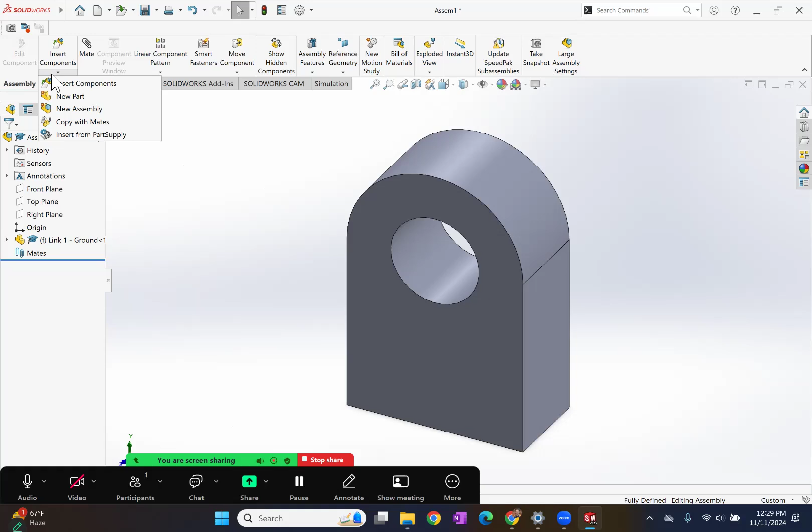Now you could either add them in one at a time and constrain them as you go, or you can add them in all together, just place them more or less where they should be, and then constrain them, which is what I'll be doing. So we have link two, also add link three, and then finally link four.

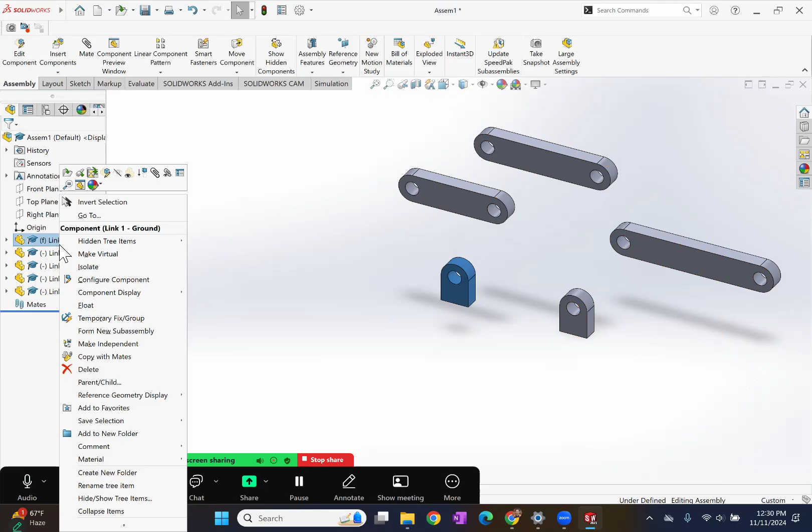So for my first constraint, or my mates, these two shouldn't be moving. These two will be our fixed parts. Before we are able to constrain them where we want them, we should make sure they're floating, so we're able to move them around. And these two, like I said, are going to be our foundation.

So the constraint that I want for this first part, I can make a mate, and then I want to constrain. I want to find that linkage, which is this guy here. I want to constrain its origin to the origin of the assembly file. So now they share the same origin. Make sure you have our axes aligned. So that one's now fixed.

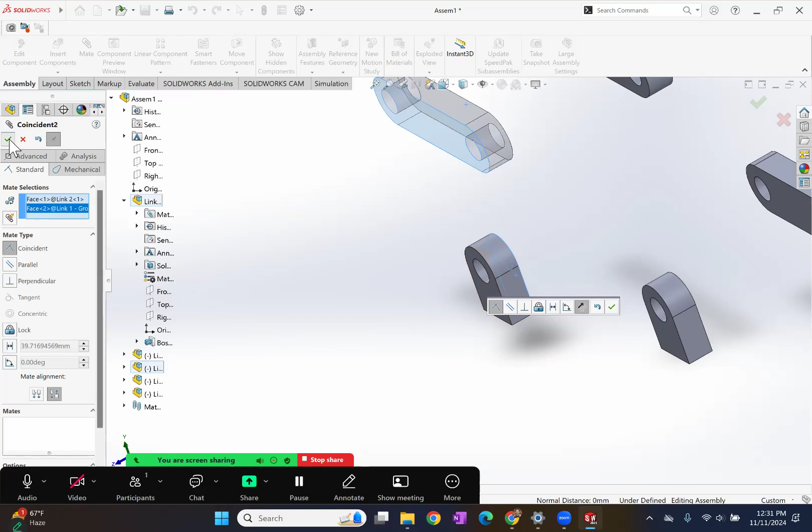My next constraint should be linkage 2 to linkage 1. For the four-bar linkage setup, these faces should be coincident to each other. Could finish that. Then I can also make the bores concentric. So what that does, now that the bores are concentric and the faces are mated together, this basically rotates about the same hole.

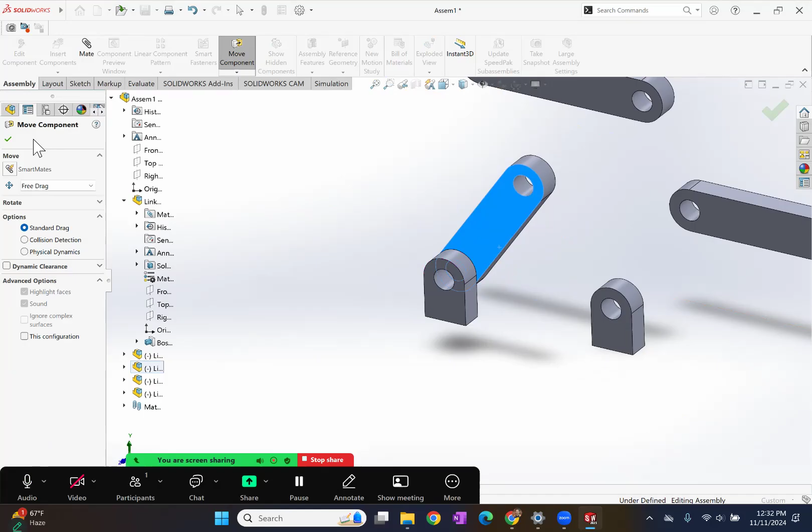So we'll just keep adding to our assembly here. Let's keep adding more mates, and they're very similar. So the next mate should be the front face of linkage 3 with the back side of linkage 2. Go ahead and add that. Similarly, let's also add the concentric mates to the bores. Now when I grab it, you can see what those mates do.

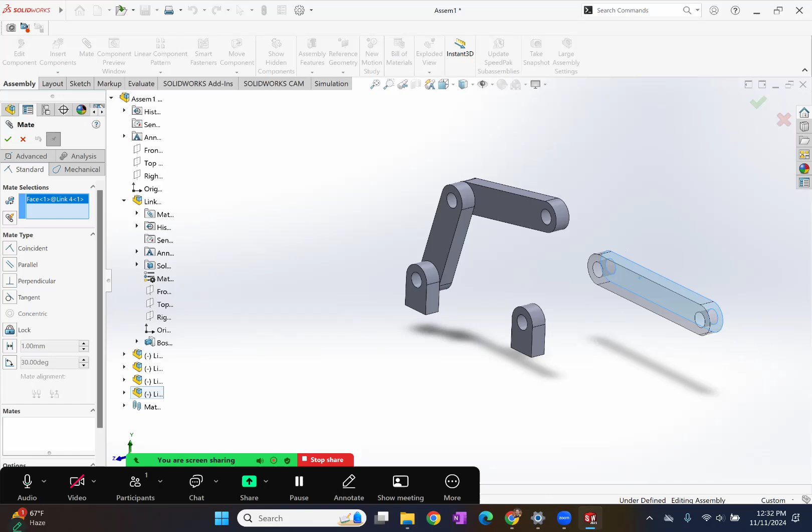So let's keep adding on. For this linkage 4, its backside should be constrained with the front side of linkage 3. Same thing with the concentric mates. And then also this and this should be concentric. Looks like it moved it to the back. So I can flip the alignment, move it to the front where I want it to be.

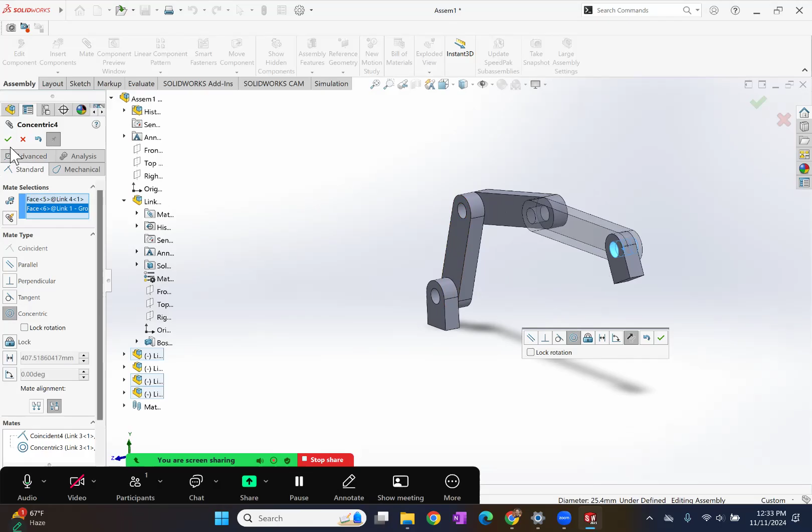Now this one should also be mated to the ground, such as our first support is, so we can add a constraint from the bottom faces. So now those two are in line with one another.

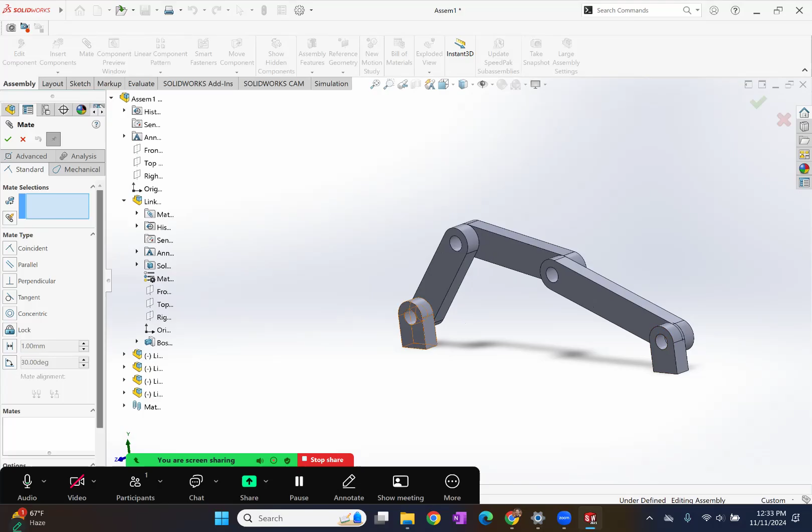And our final constraint should be a distance mate between the first and second support. So you can click on any face, just any part of them. You want to add a distance mate. In this case, it would be 12 inches, just something so they're fixed relative to one another. So now these shouldn't move.

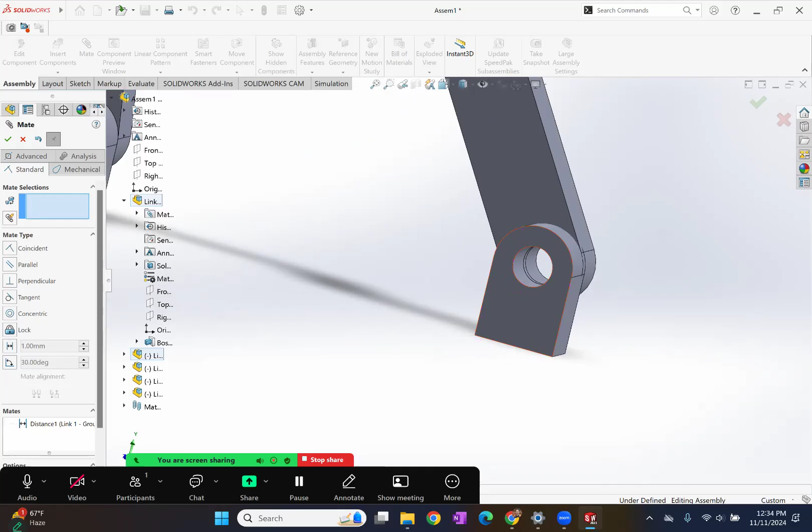So now that we have everything mated, actually it looks like we have a problem here. Let's go ahead and fix that. What I could do is find whatever mate was causing that issue, which I believe to be this one. I'll just delete it. Should be able to move this slightly forward.

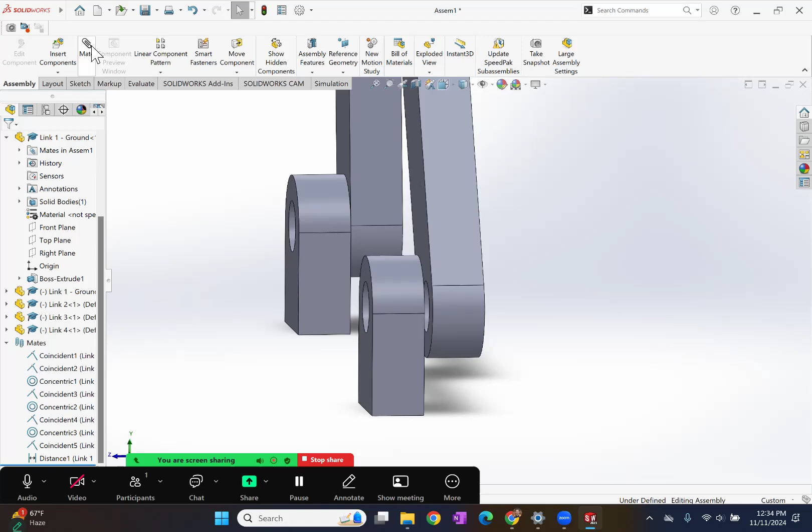Let me go ahead and now add a concentric mate once more. So this and this one should be concentric, which they are. And then the final mate should be between these two faces. Looking back at it, I think that concentric mate was fine. I just didn't have the mate between the two faces. So you could have just added that and it would have been okay.

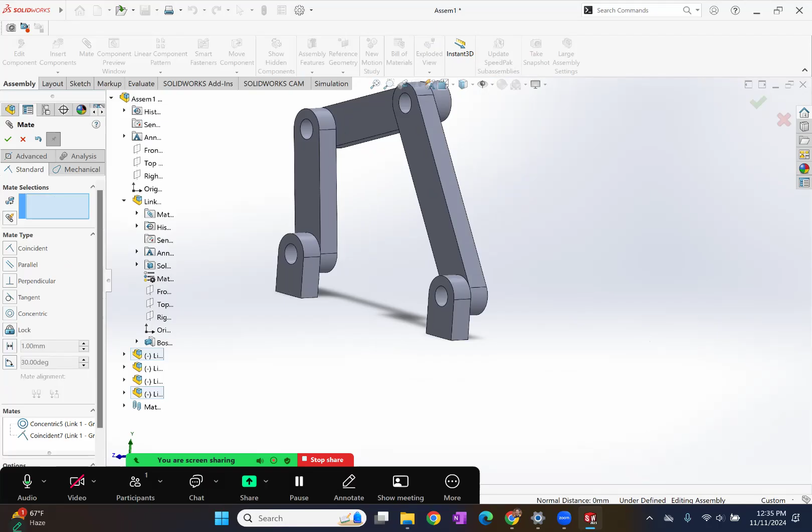So now we have our very basic 4-bar linkage setup. And I should be able to grab this component and rotate it. Should not be able to move the supports. So I'll try to do that and cannot move them. So that's fine. That's what we want. Now that we have our assembly constrained and set up like we would like it to be, let me move this out of the way.

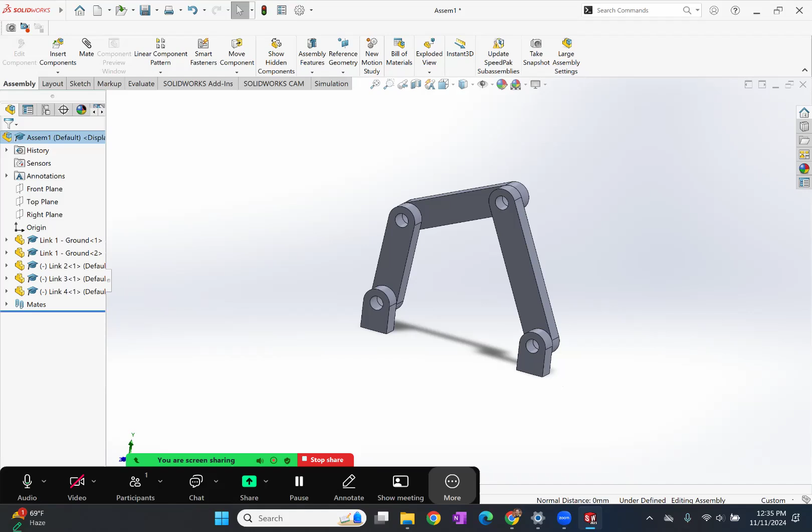All right, hopefully that doesn't bother you guys too much, or maybe I can hide it. There we go. So now that we have our assembly set up, we can go to motion study down at the bottom. Let me expand this a little bit.

So in motion study, right now we have two options, animation and basic motion. As you can see, animation is motion driven by key points or motors and constrained by assembly mates, whereas basic motion is a little bit more realistic of a simulation using assembly mates, springs, gravity, and motors. So for the purposes of this demonstration, animation will be just fine. We just want to show the motion that can happen with the given constraints.

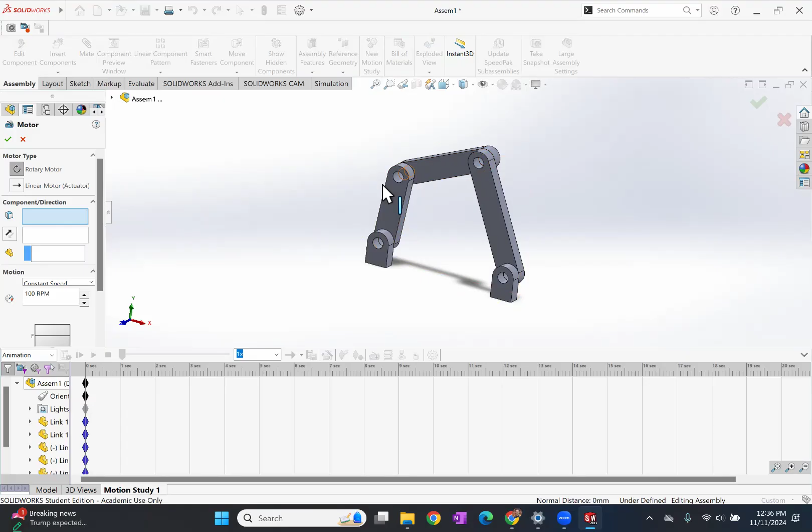And to add a motion, we can add a motor, which is what I clicked right here. I clicked on the motor. This is the face that we want to select to be driven, the inner ring of linkage 2, I believe that is. And then it shows you the direction of travel that the motor will be driving.

If you're rotating, which is under rotary motor, and right now it's going clockwise, if we wanted to switch it, we could switch it to counterclockwise by clicking on this button. We could also select, let me see if I can move this. It's a bit hard to see. I'm not sure why it's like that, but you can read it.

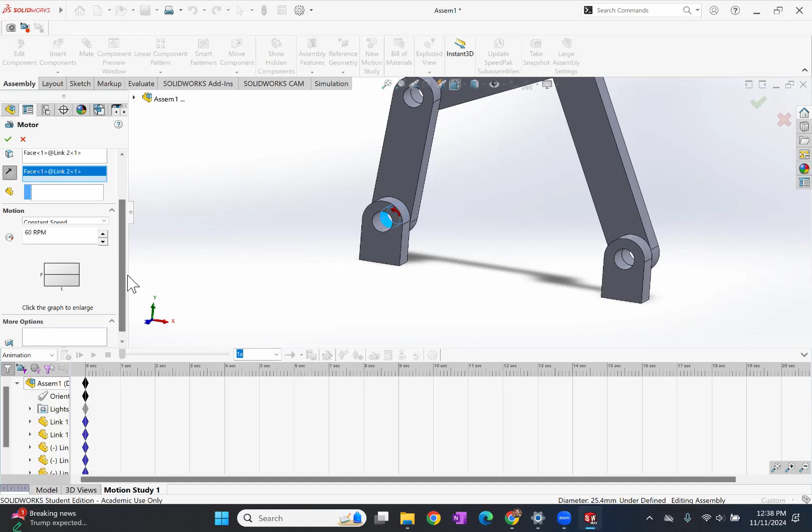There's a few settings. We have constant speed, distance, oscillating, segments, data points, expression. For this demonstration, constant speed will be just fine. You can set the specific RPM that you want your motor to be rotating at, RPM standing for revolutions per minute. We'll set it to 60 right now just to slow it down a little bit from 100. Might have been too fast.

So now we set that motor to 60. We went ahead and finished it. And if we play the animation, you can see it rotates that second linkage. And due to the constraints, it rotates the entire linkage assembly. And at the end there, I don't know if you heard it, there was a little chime that signifies that you reached the end of your motion study.

So I think 5 seconds is a bit too long for this demonstration. So if you grab this key here, you can shorten it. There's a timeline bar up at the top. So I can shorten it to 2 seconds. If you ever make any changes, you most of the time want to hit calculate. That calculate button is similar in my opinion to the rebuild button whenever you're working on an assembly and you make some changes.

SolidWorks asks you, do you want to rebuild now? Most of the time you hit yes, so you can rebuild, and then your assembly would adopt those changes that you've made to your parts, and then you can go from there. So similar with the calculate button. If you make any changes, you want to hit calculate. If you just hit play, it wouldn't have adopted those changes that you've made.

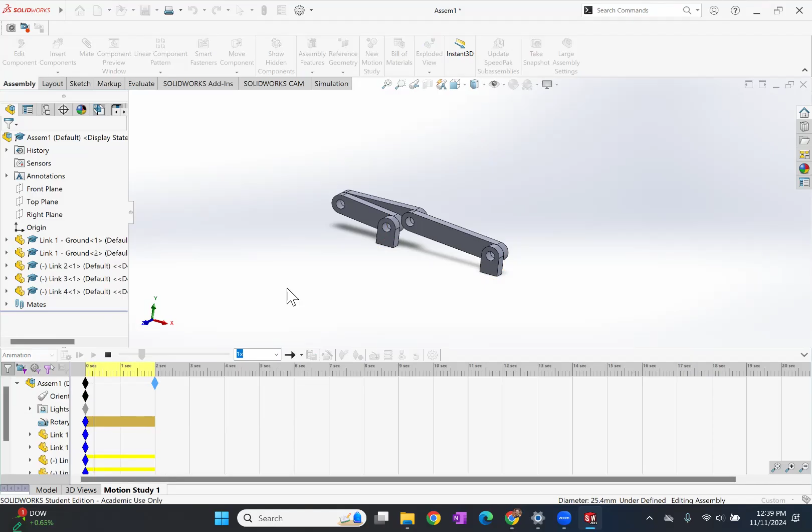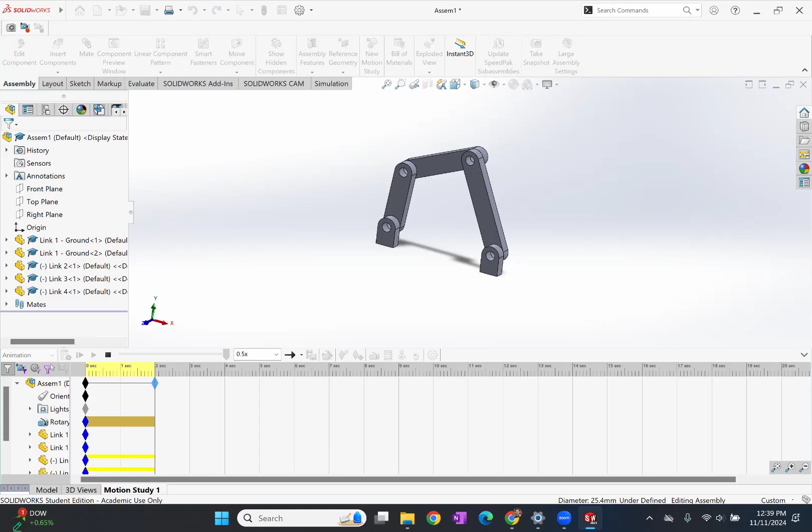So now when I hit play, same motion, same speed, but this time 2 seconds long versus the 5 that I had previously. You can change the playback speed, so I can speed it up 2 times if you want to fast forward through it. You could also slow it down to half speed. It'll just slow it down a little bit. Change this back to 1.

Let's see what else. That's pretty much it for this very basic demonstration. Again, you hit play or play from the start, and it'll run through your motion. So that was pretty much it for this first 4-bar linkage setup. Thank you.